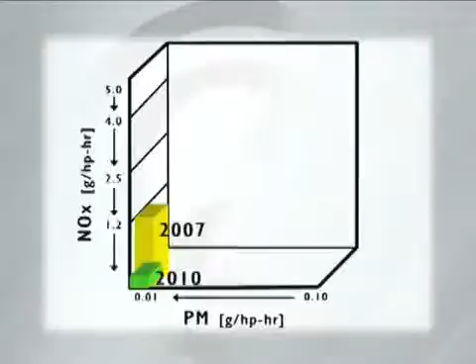In 2007, the primary focus of EPA regulations was on the reduction of particulate matter, resulting in the addition of a diesel particulate filter and an oxidation catalyst. Now, the EPA regulations are targeting a reduction in nitrogen oxides, NOx, in combustion emissions. By 2010, these levels must be reduced by 83%. With our reliable Bluetec technology, Detroit Diesel meets these emission standards head-on while simultaneously improving fuel economy.

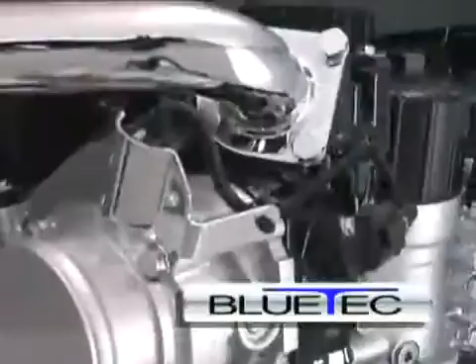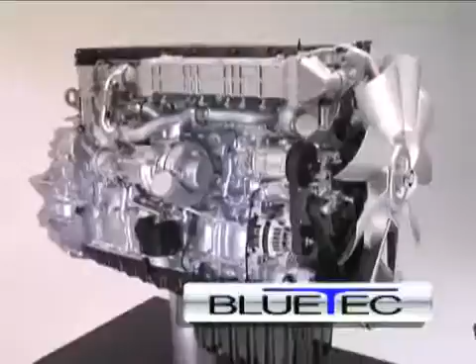Detroit Diesel's heavy-duty engines will be able to incorporate SCR emission technology with only minor changes to the existing engine hardware. Detroit Diesel engines utilize Bluetec technology, a selective catalytic reduction or SCR system, to meet 2010 EPA emission standards for commercial vehicles. As part of the Daimler Trucks family, Detroit Diesel is using Bluetec technology, which is used today in hundreds of thousands of Daimler trucks worldwide.

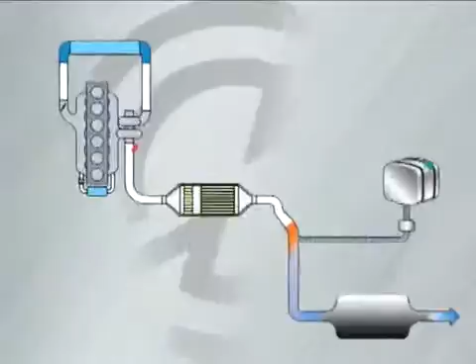Detroit Diesel's adoption of Bluetec for 2010 enables us to improve engine performance and fuel economy while maintaining durability and reliability. Bluetec begins to work as the exhaust leaves the engine with the pollutants, NOx, and particulate matter. The exhaust travels downstream into the after-treatment device where the particulate matter is trapped in the diesel particulate filter.

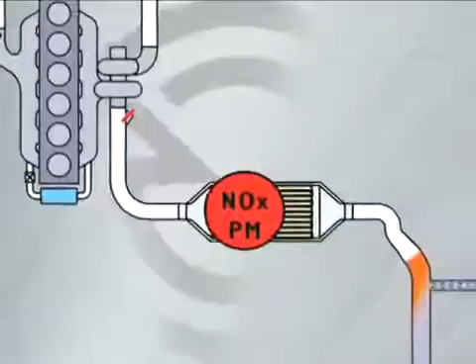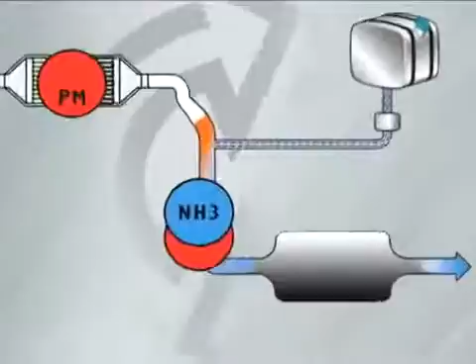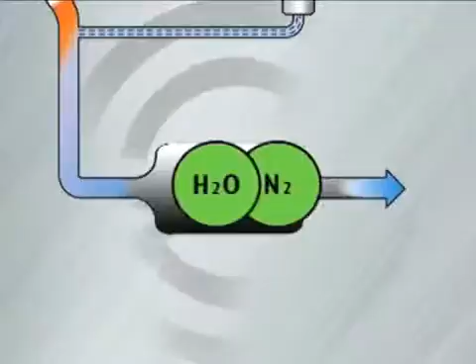The NOx continues to flow downstream where it is met by diesel exhaust fluid, or DEF. The DEF solution then hydrolyzes into ammonia gas, or NH3, which continues to mix with the exhaust. Once in the SCR catalyst, the NH3 and NOx react to form nitrogen and water, both of which are naturally present in the air we breathe.

Well, my name is Steve Williams. I'm Chairman and CEO of Maverick USA, Inc. in Little Rock, Arkansas. SCR, even though it's maybe new to many of us in the States, is certainly not a new technology. I'd say it's proven technology, certainly from the European experience. I believe that the adoption of the diesel exhaust fluid in the U.S. is going to be a non-event.

I wouldn't characterize this technology as complex. Pretty straightforward on how it works, pretty straightforward on what the operational characteristics are, and some of the concerns have been easily addressed from my perspective. SCR seems to me to be the ideal solution to meet the 2010 engine mandate. And I say that in regards to the fact that it allows the engine to operate in its most optimum environment that it can for fuel efficiency, and then be able to treat the exhaust so that we in fact reduce or eliminate the pollutants.

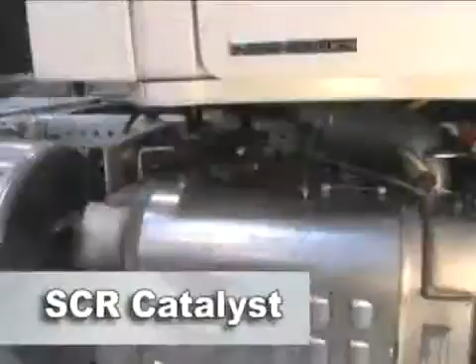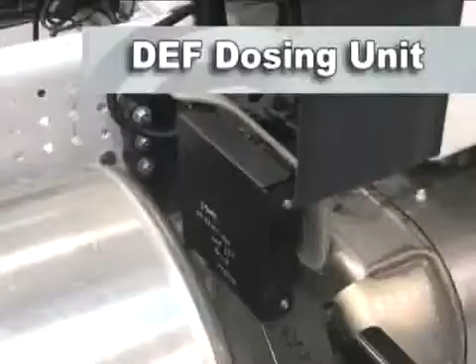The Bluetec SCR system does require some additional equipment on your truck. The primary components of the Bluetec system include the DEF tank, which is mounted on the driver's side of the vehicle, the SCR catalyst, which is housed in a single box configuration along with the diesel oxidation catalyst and the diesel particulate filter. This will be the configuration used in most on-highway applications. And the DEF dosing unit, which is mounted at the top of the single box after treatment system. DEF flows from the tank to the dosing unit, which electronically controls the amount of DEF that enters the exhaust stream.

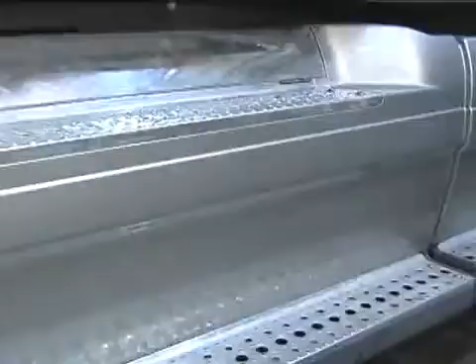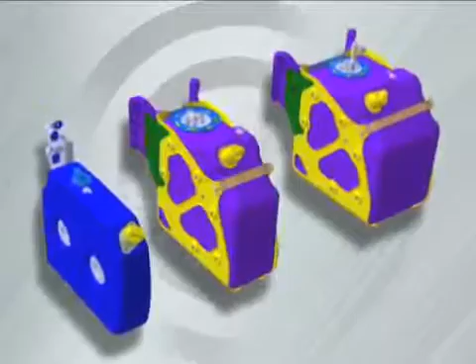The DEF tank will be located next to your fuel tank on the driver's side of the vehicle. Depending on your driving and fueling cycle, the tanks will range in size from 6 to 23 gallons. Since DEF consumption is equal to approximately 2% of diesel fuel used, you will only need to fill your DEF tank every 2 to 3 fuel refills. As you can see, you'll be able to travel across the country on less than one full 13-gallon tank of DEF. DEF can be purchased at your local fueling station in small disposable containers or at pumps available for traditional bulk filling.

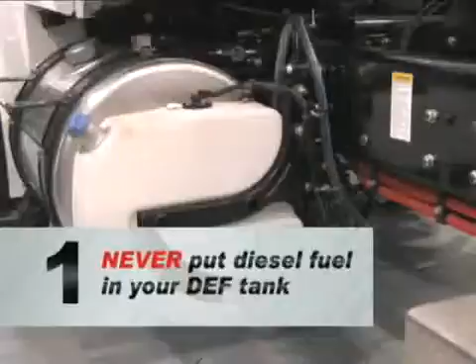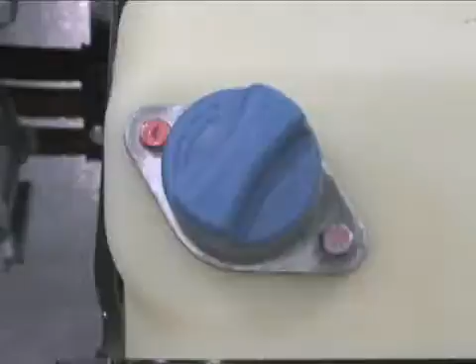Some fleets will choose to keep bulk quantities of DEF at their own location. However you choose to purchase your diesel exhaust fluid, there are a few things to remember when filling the tank. First, never put diesel fuel in your DEF tank. To keep this from happening, manufacturers have employed some safeguards. The fill nozzle of the DEF tank is sized so that a diesel fuel dispensing nozzle will not fit. As an additional safeguard, the DEF tank fill nozzle contains a special magnetic ring.

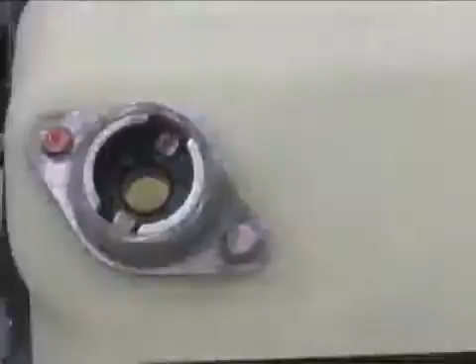This ring connects with a mating ring in DEF dispensing equipment found at truck stops. DEF will flow from the dispenser into the DEF tank only when both magnetic rings are present. This magnetic interface system also prevents someone from accidentally putting DEF into their diesel fuel tank.

The second thing to remember is that DEF freezes at 12 degrees Fahrenheit or minus 11 degrees Celsius. This will not affect your ability to fill your DEF tank because filling stations will have heated pumps. And finally, although DEF is non-toxic, you should clean up spills with water or a mild solvent to avoid staining aluminum components.

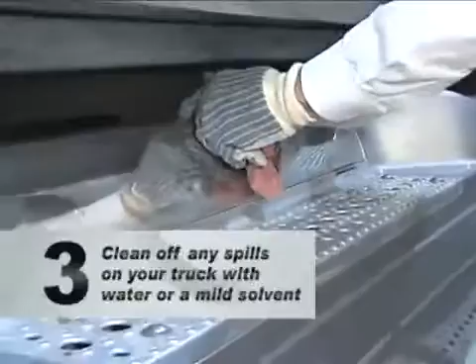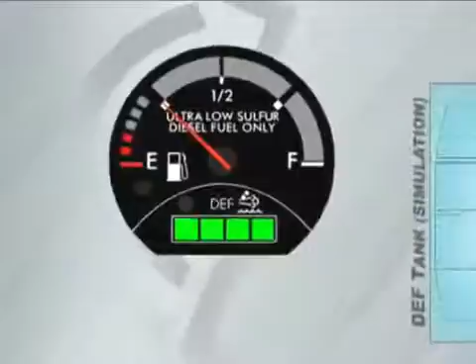You might be wondering how you will know when you're running low on DEF. In addition to the Bluetec hardware, there is a new DEF gauge. Just like filling up a diesel tank, drivers will need to remember to watch the DEF gauge and fill the tank when needed. The DEF gauge consists of 4 LED bars. The fourth bar is a tricolor display that works with the other lights in the dash panel to alert the driver to low DEF conditions.

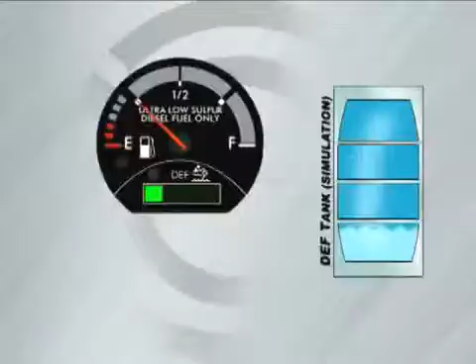When the DEF tank falls to 10% full, the fourth bar will change from green to solid yellow. The DEF lamp will also display a solid yellow light. When the DEF tank level falls to 5%, the fourth bar will change from solid yellow to flashing red, the DEF lamp will flash yellow, and a check engine lamp will be illuminated in the dash.

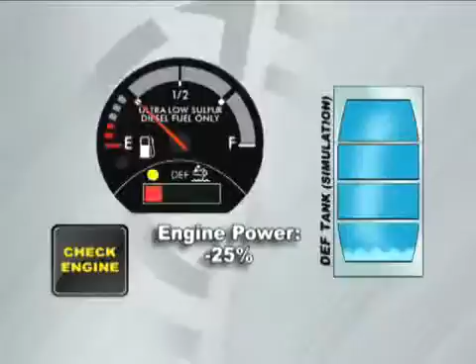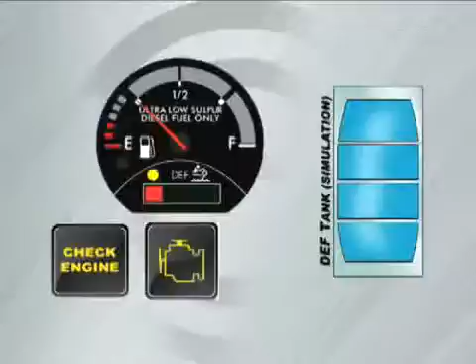At this point, the first government-mandated inducement will occur. The engine power will be derated by 25%, and the vehicle's road speed will be limited to 55 miles per hour. When the DEF tank level goes to 0, the malfunction indicator lamp will illuminate and the truck's engine power and road speed will remain limited. Once the DEF tank is empty, there are government-mandated limits on how long the vehicle may operate.

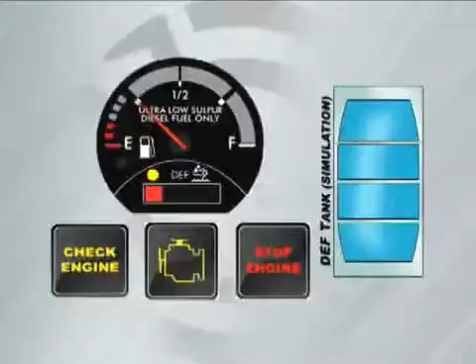If the driver continues to ignore these warnings, the next time the vehicle stops and restarts with no DEF in the tank, road speed will be limited to 5 miles per hour, and the stop engine light will appear in addition to the other warning signals. What you need to remember is that DEF is just as important to running your vehicle as diesel fuel. So monitor your gauges and keep on trucking.

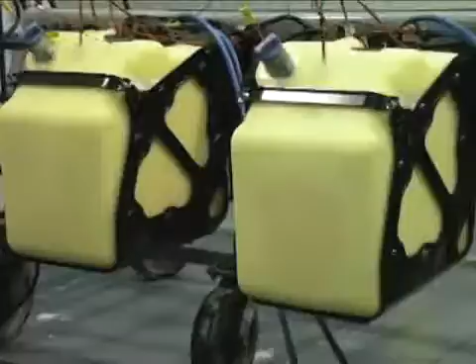Now let's answer a few frequently asked questions. What will happen if DEF freezes in my DEF tank? Because DEF begins to freeze at 12 degrees Fahrenheit, provisions have been made for the system to thaw frozen DEF and then make sure that the DEF continues to flow in even the most extreme conditions. A completely frozen tank of DEF thaws from the bottom up, allowing DEF to begin flowing.

This thawing is accomplished by routing engine coolant through the DEF tank. In fact, all tests have shown frozen DEF to thaw out and begin flowing well under the time permitted by EPA guidelines. DEF flows through heated lines to maintain flow in very cold temperatures. What if DEF gets on my skin? DEF is non-toxic. If DEF does get on your skin, wash your skin with a mild soap.

What is this white crystal substance on my tank? This is most likely due to a small spill of DEF that has had the water portion of DEF evaporated off. Remember, DEF is non-toxic. Where can I find a location to fill my DEF tank? DEF locations are located throughout North America. Please visit www.detroitdiesel.com for more detailed locations.

The Bluetec SCR advantage is clear. SCR is a proven technology used worldwide and has been selected by almost all NAFTA engine manufacturers. Experience has shown that the SCR system is easy to understand, service, and maintain. SCR technology allows Detroit Diesel to maintain our current engine design with no major component changes.

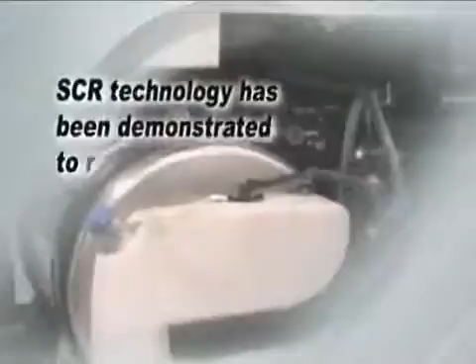SCR technology has been demonstrated to result in a fuel economy savings of up to 5%. And DEF is a non-toxic fluid which will be readily available at thousands of locations across North America. We hope this answers most of your questions about driving a Detroit Diesel Bluetec engine.